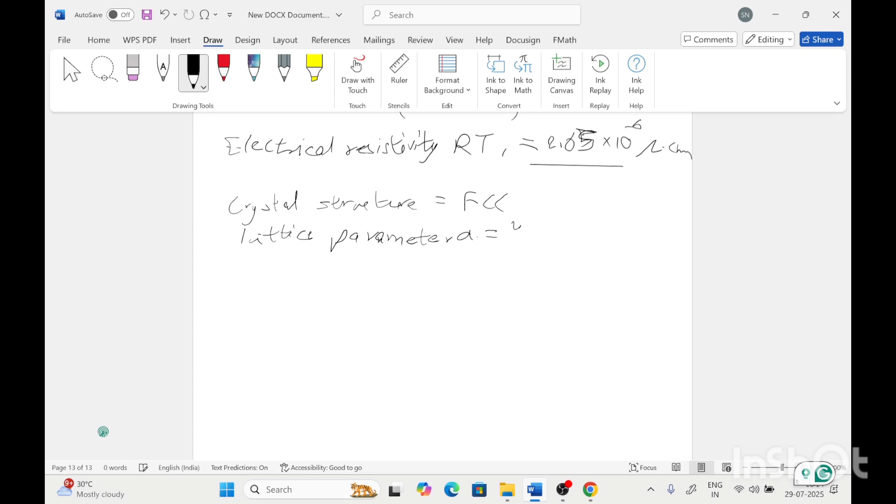Then its crystal structure is FCC. Its lattice parameter a is 4.05 angstrom, and its atomic number is 13, and atomic weight is 26.98, approximately 27, and it is a paramagnetic material.

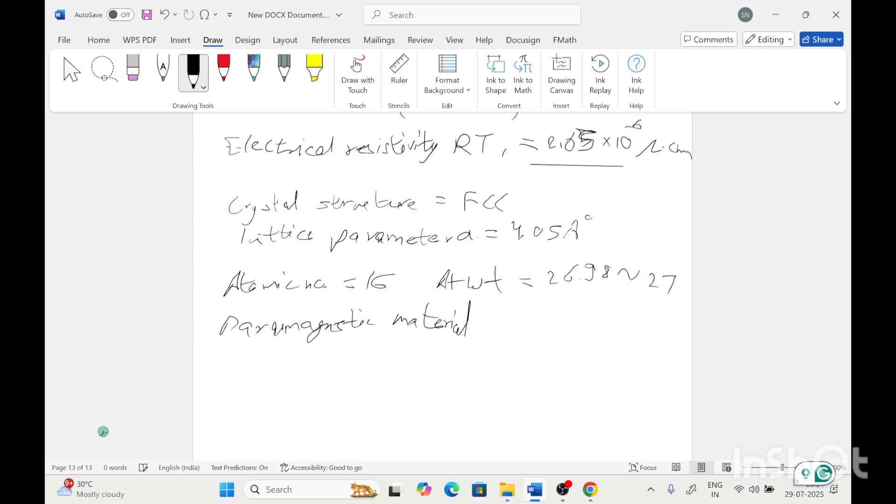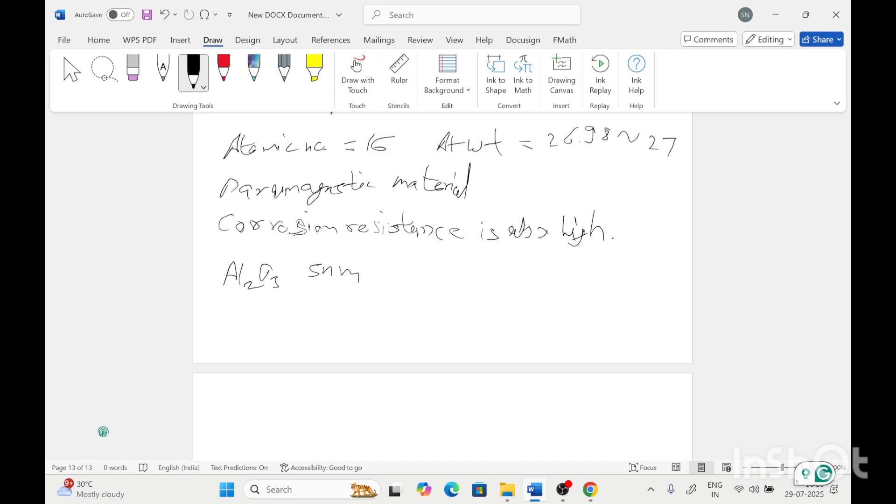So these are the general properties of aluminum. Its corrosion resistance is also high, meaning it does not rust. In iron or steel we can see rust forming, and for copper and silver also we can see some rust form because of oxidation. But aluminum alloy has a very thin layer of aluminum oxide, around 5 nanometers, which is very thin and very adherent to the aluminum surface, and will prevent further corrosion of the aluminum.

And if we talk about its purity and mechanical properties, generally purity is around greater than 99.99%. So if we decrease the purity, its mechanical properties like yield strength, tensile strength, and ductility are affected.

The highly pure aluminum is very ductile. We can form any shape from high purity aluminum. And if we decrease the purity, meaning mix any other alloying element, we increase the strength and decrease the ductility. So with decreasing purity, its strength goes up and ductility goes down.

And its elastic modulus is around 72 GPa, and its shear modulus is around 27 GPa, and its Poisson's ratio is 0.34. So these are the general physical and mechanical properties of the aluminum.

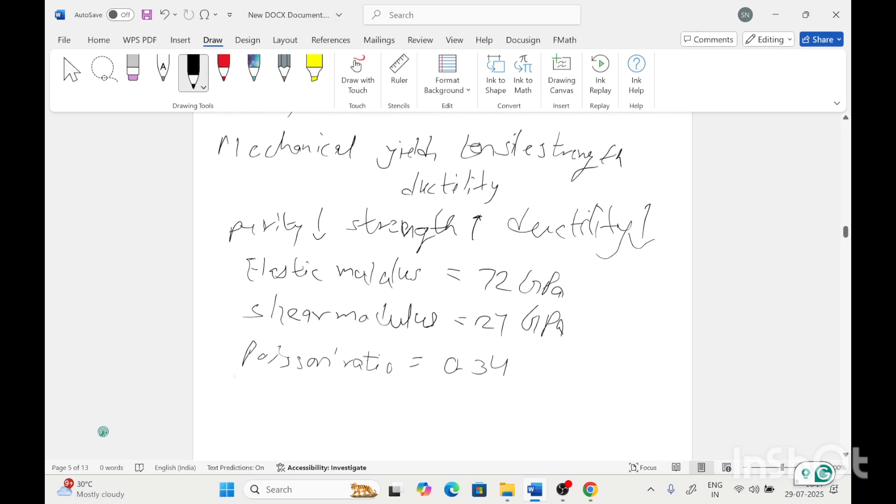Next is what impurities can be in aluminum. First we will talk about the sources, meaning where the impurities come in the aluminum alloy. Impurity sources: the main sources are during the extraction process. Next is the makeup chemicals, meaning in refining we use various types of chemicals, and from these chemicals the impurities can enter the aluminum melt.

Next is the anode carbon, in the refining process. Anode carbon, refractory lining, and fifth is steel tooling. So these are the sources of impurity in aluminum.

And what type of impurities come under these categories? First is elemental impurity, like iron, tin, zinc, copper, magnesium, etc. And also inclusions, meaning compounds. Inclusion forms during the extraction or refining processes like oxides, carbides, nitrides, and borides. So these are the impurities in aluminum.

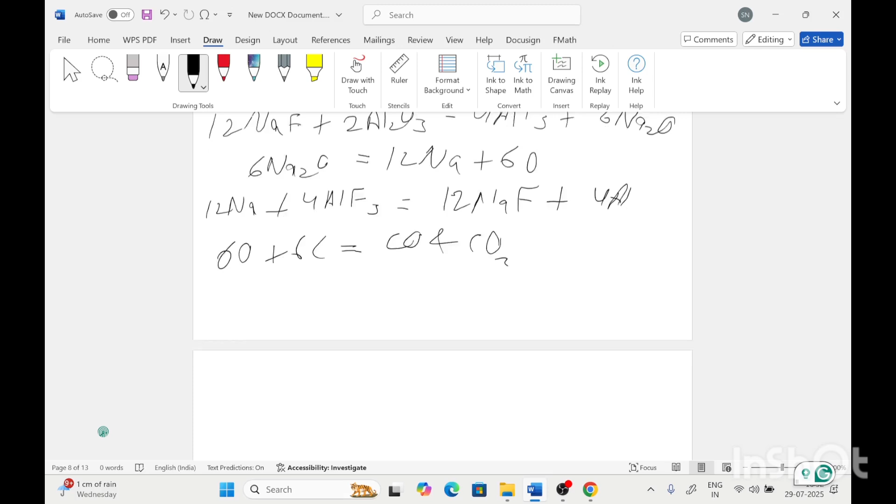The aluminium obtained from this extraction process is refined further to remove other impurities like oxides or elemental impurities. Fluxing is done after the extraction process. The fluxing agents are NaCl or KCl, which remove the oxide inclusions.

After fluxing, once impurities are removed, next degassing is done to remove hydrogen gas, using vacuum.

So this degassing can be generally done by generating vacuum or by gas purging. What we use for gas purging is argon gas. Argon gas is noble and non-reactive, so this argon purging is done.

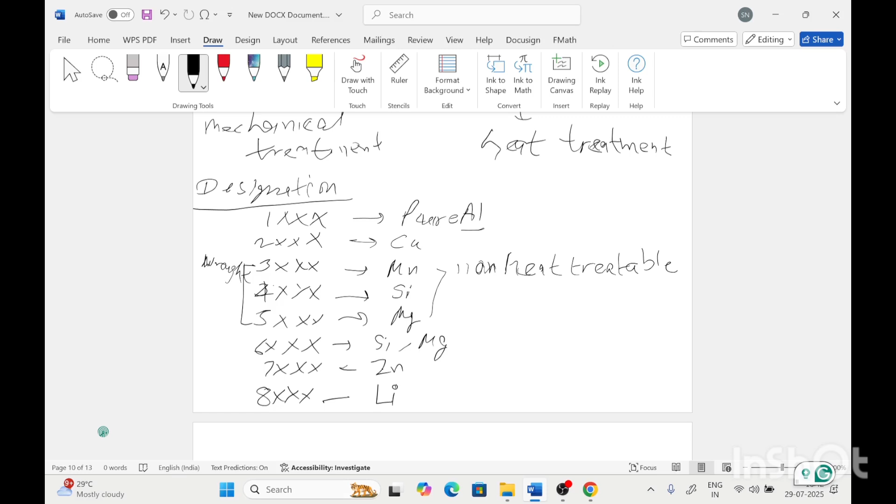And other than this pure aluminum, the 2000 series, 6000, 7000, and 8000 are heat treatable. This aluminum copper is also heat treatable.

So in the casting process, these alloys are further classified into different nomenclature. For casting aluminum alloy, we use other designation.

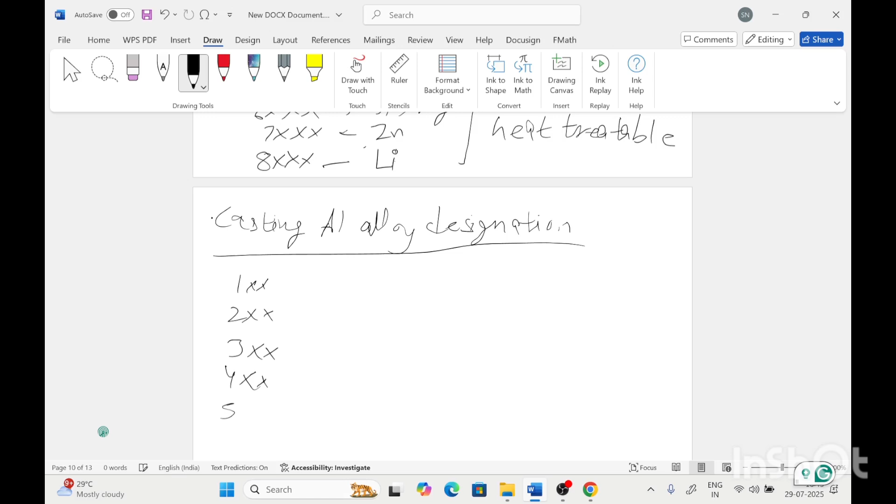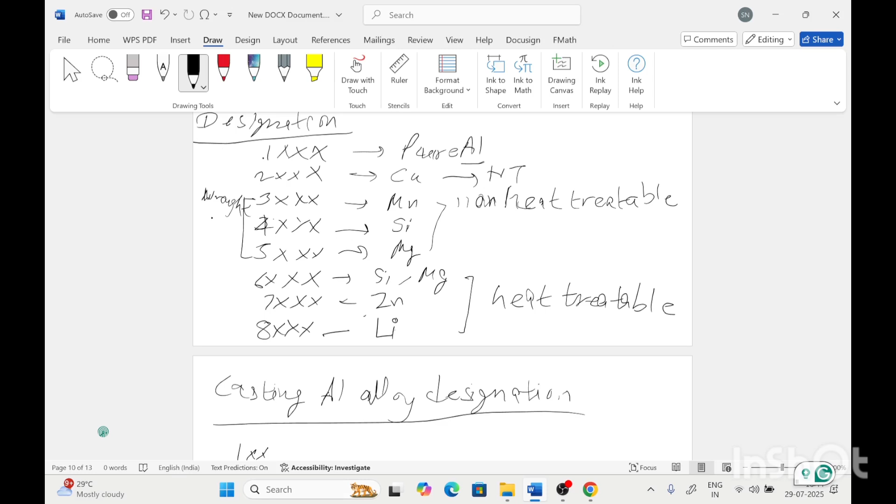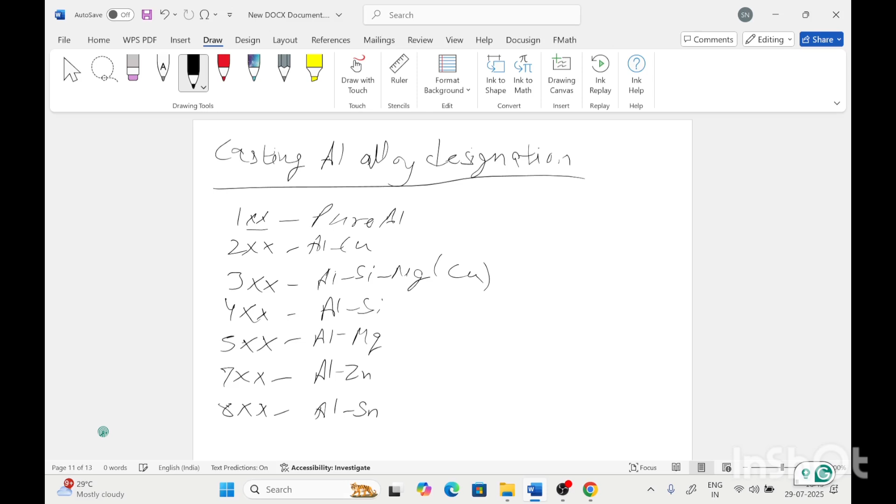For this alloy designation: first is pure aluminum. Second is aluminum copper. Third is aluminum silicon, magnesium, also with some copper. Fourth is aluminum silicon. Fifth is aluminum magnesium. Seventh is aluminum zinc. And eighth is aluminum and tin. So these are the casting alloy designations.

And here another form also comes, meaning 1XX.X or 3XX.X. Here the other digits come, and this X after the decimal point can have two values, 0 or 1. So dot 0 means it is in casting form, and dot 1 means ingot. Both represent the casting alloy.

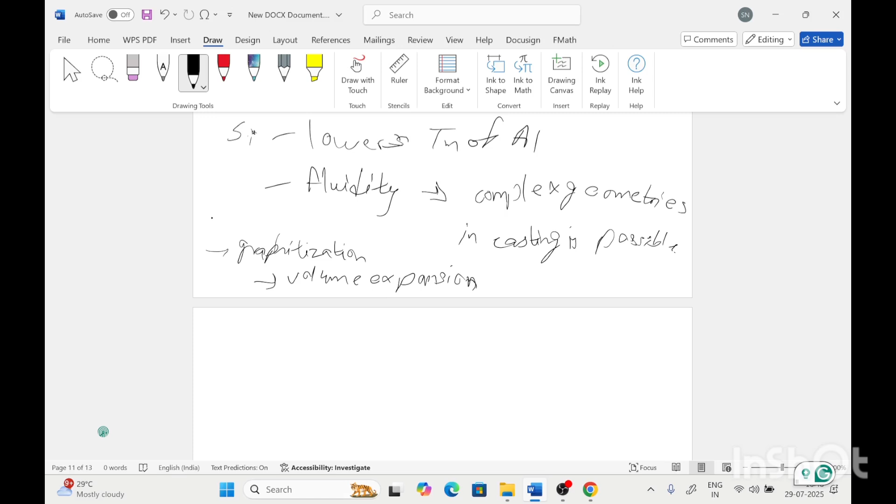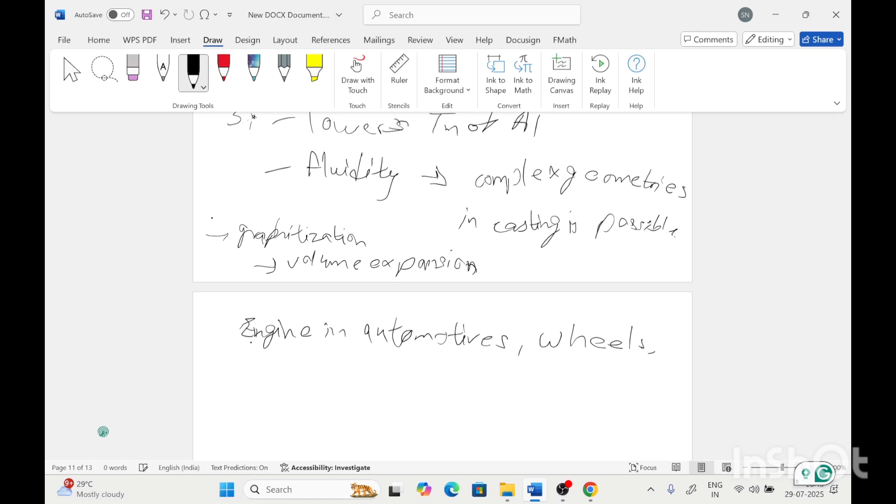This graphitization increases volume, meaning it has volume expansion. So the volume expansion will compensate for the solidification shrinkage during the casting process. So this is also good. It has applications in engines or in automotives, wheels, and so the aluminum alloy in the automotive - the main purpose of the aluminum alloy is weight reduction.

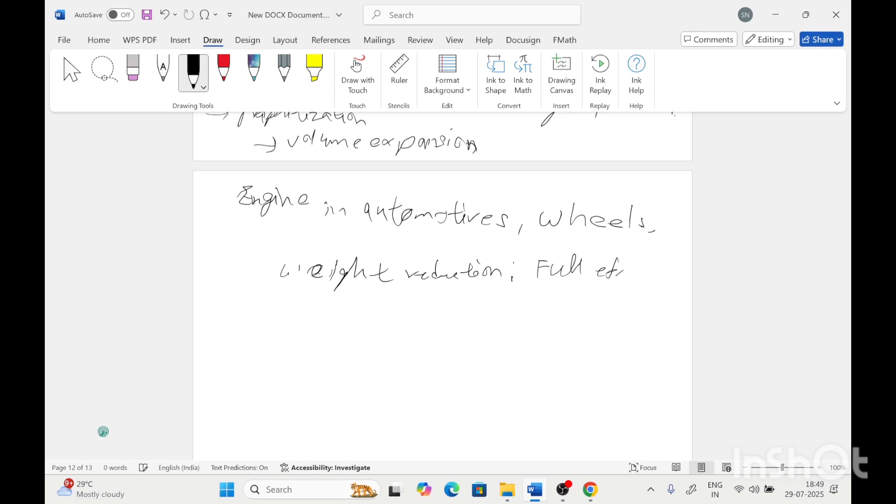Weight reduction will provide the full efficiency of the automotive. So how does silicon modify this aluminum's properties? First we will understand the phase diagram of it.

This is aluminum, temperature in degrees Celsius, and the weight percent of silicon. Aluminum's melting point is 660, and silicon's melting point is around 1400 degrees Celsius. So if we draw a diagram, it has this structure.

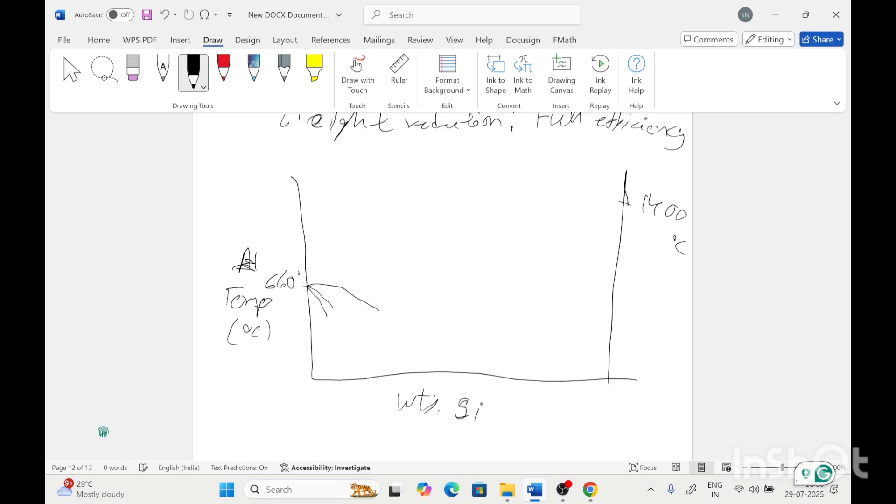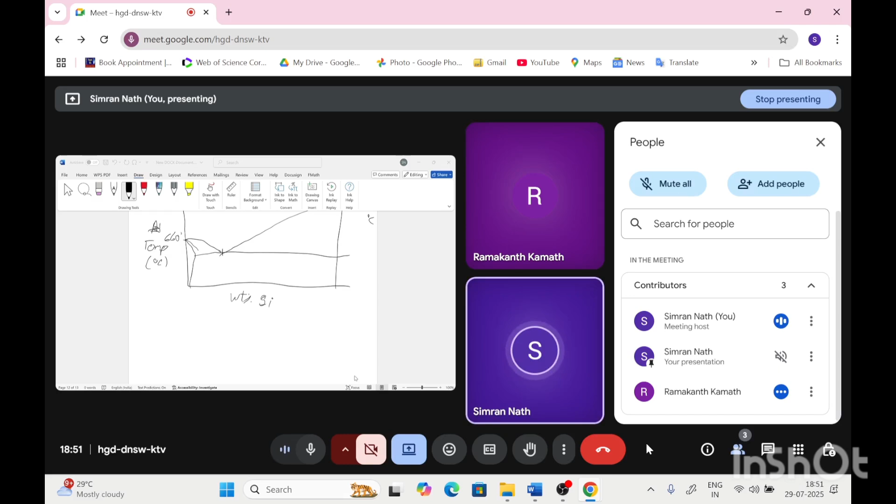This point is called the eutectic. Do you know about the eutectic reaction? What is the eutectic reaction? It means the liquid transforms into two types of solids.

This point is in the eutectic form, so here alpha aluminum plus silicon forms, and the silicon present in the structure of the solidified alloy is in flake form or needle shape. So here is liquid plus silicon, and alpha aluminum plus liquid.

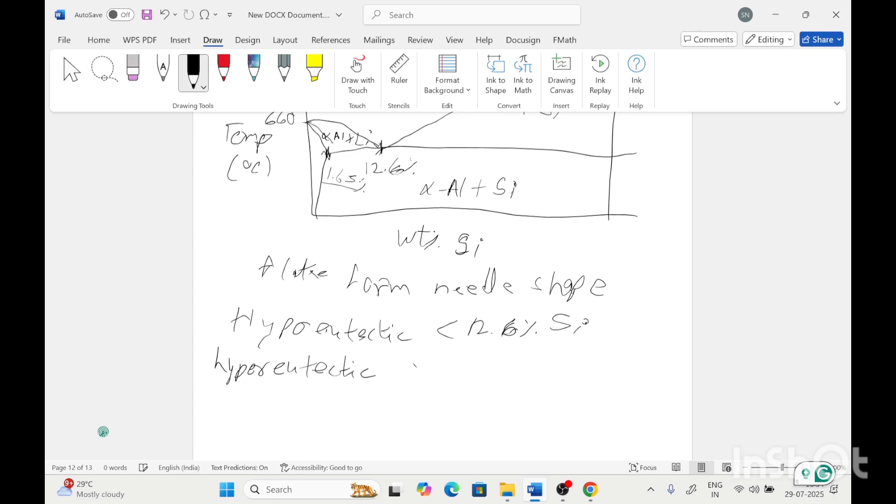Based on the eutectic point, we can divide alloys into two types: hypoeutectic and hypereutectic. Hypoeutectic has silicon percent less than 12.6%, and hypereutectic has silicon greater than 12.6%.

As silicon is present in flake or needle shape, for mechanical performance of the alloy this needle shape is not required because it leads to stress concentration in the component and early failure. So we do not require this needle shape morphology of the silicon.

To modify this morphology, we add a modifier like strontium. The strontium addition is generally 0.02%, very low. This small amount of modifier will change the needle shape into a globular or spherical type. It reduces stress concentration and sharpness of the flakes, leading to a fibrous microstructure.

Other types of modifiers can also be added, like barium and sodium. Only a very small amount of modifier is required to change the shape, the morphology, of the silicon flake.

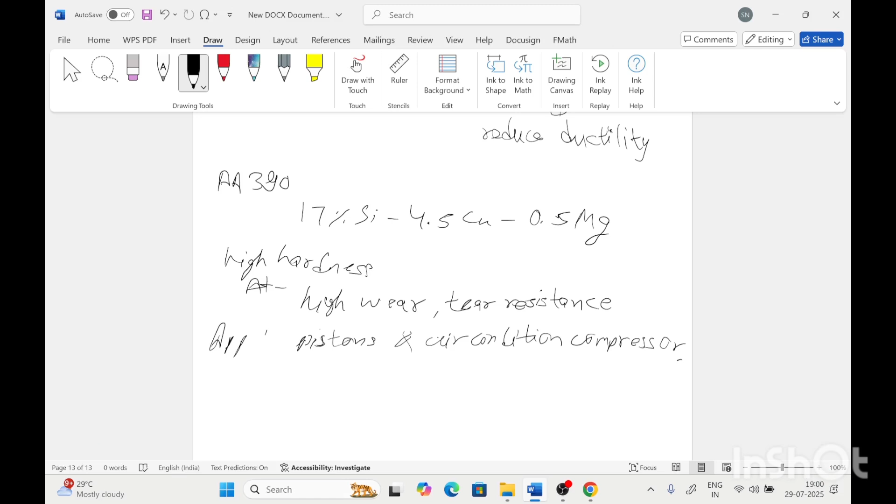The application is in pistons and air conditioning compressors. What compressor, ma'am? Air conditioning compressor - it has that application.

What is the mechanism by which silicon modifies the aluminum properties? If we talk about the growth of silicon particles, how the silicon flakes form - generally silicon has a tetrahedral structure like this type.

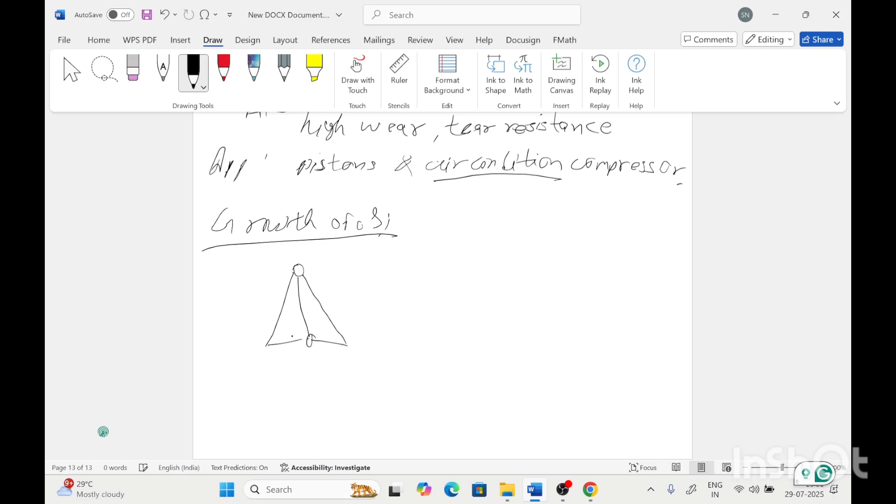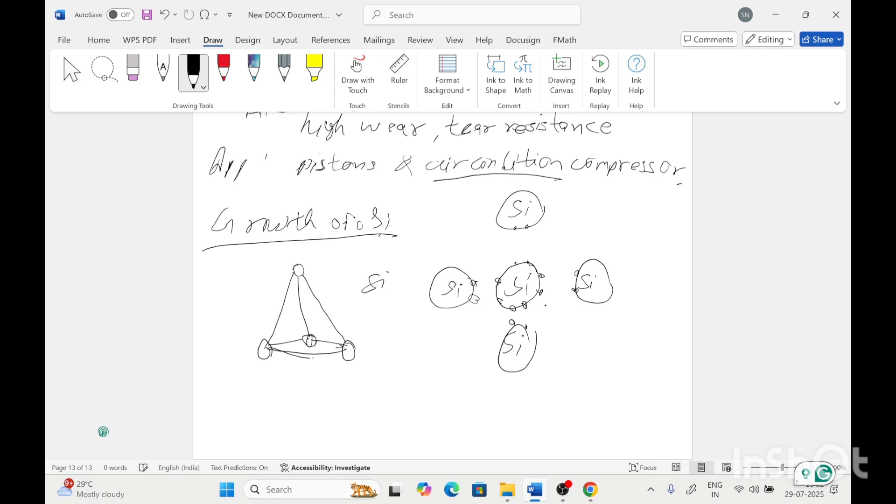This is the silicon tetrahedra, meaning it shares its valency. The silicon completes its structure like this, and for growth of the silicon flake, two tetrahedra are required.

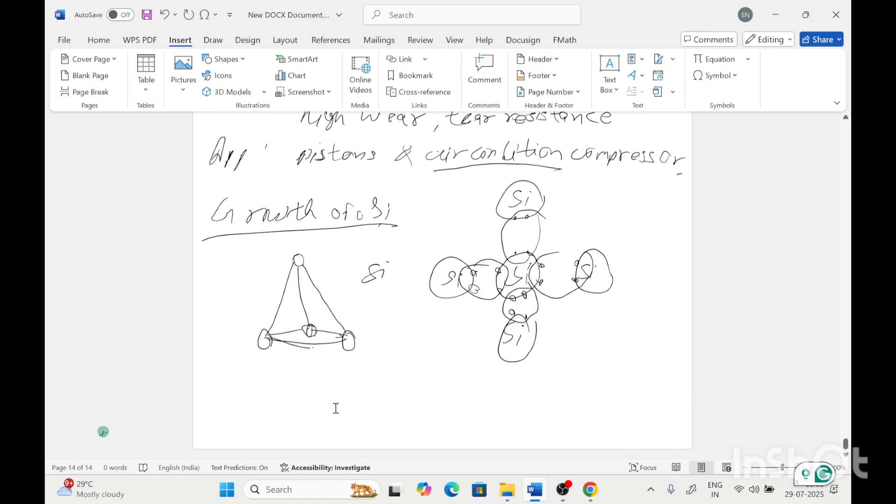So for the growth of silicon flake, two tetrahedra of silicon are required. This forms a structure like this, and the bottom, the second one, like this.

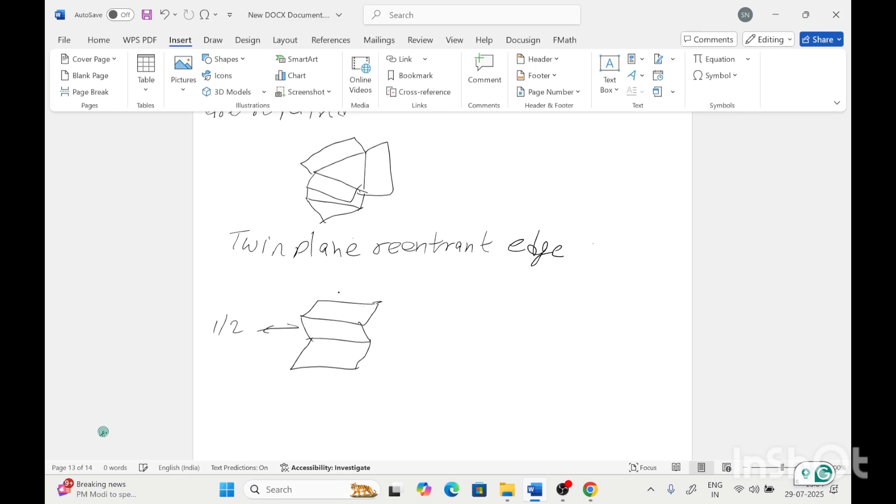This growth generally happens by the twin plane reentrant edge mechanism. Twin plane generally forms like this. This direction is 112 or 11 2 bar, and this plane is 111. So the tetrahedra will arrange in this form, 1, 2, and 3, making the twin plane, and the growth of crystal will go either in this direction or in this direction.

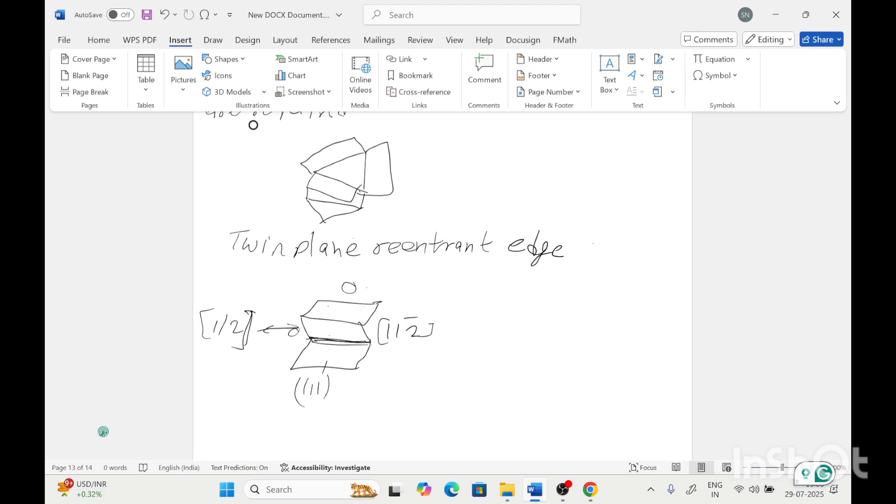Due to this mechanism, the silicon flakes form in needle shape. So to avoid this needle shape formation, modification is done.

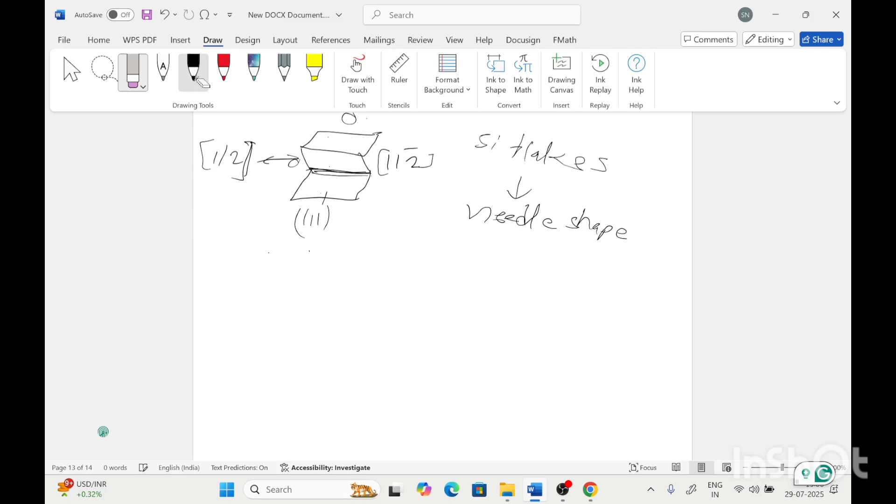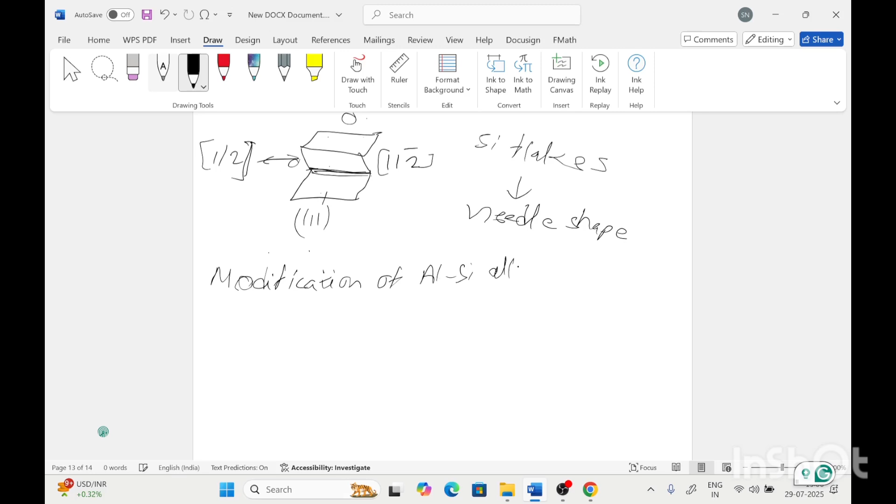Modification of aluminum silicon alloy: one theory is the impurity induced twinning theory. According to this theory, certain elements or modifiers are added, like barium, sodium, or strontium. These modifiers inhibit the growth of the silicon flakes along the 112 direction.

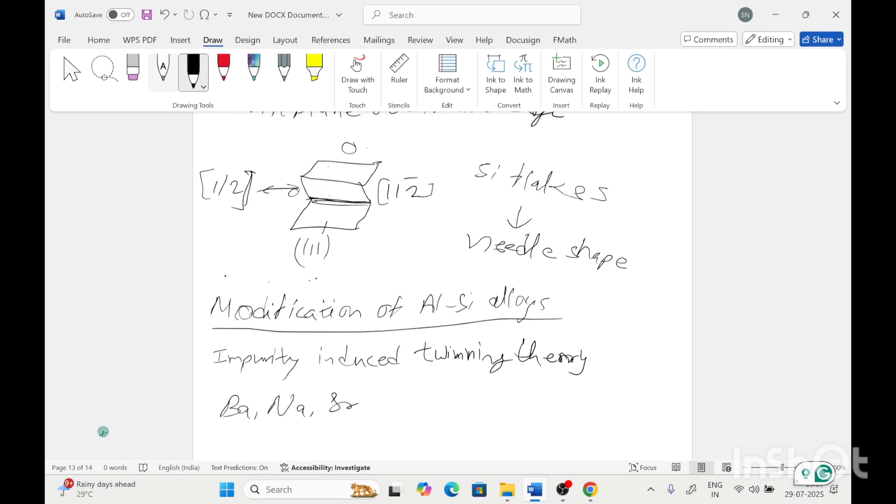By restricting the growth, this restricts the growth of the needle shape, and it also changes the stacking sequence of the tetrahedrons and forms branches during growth.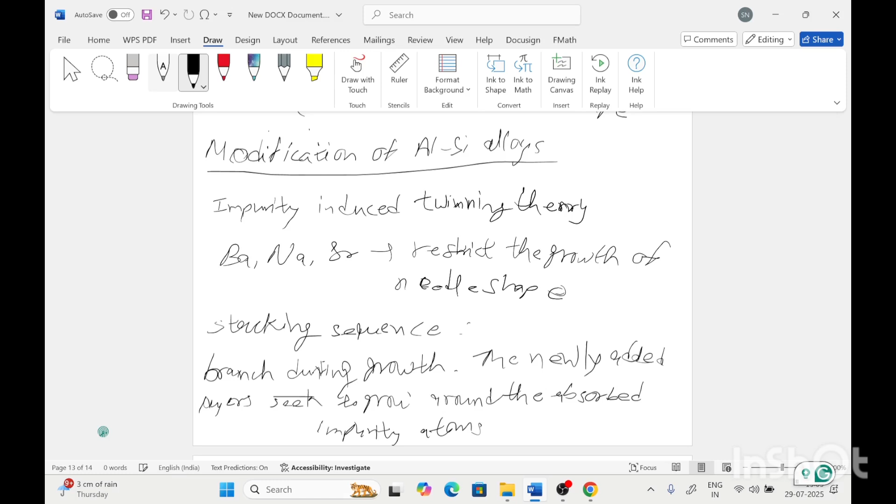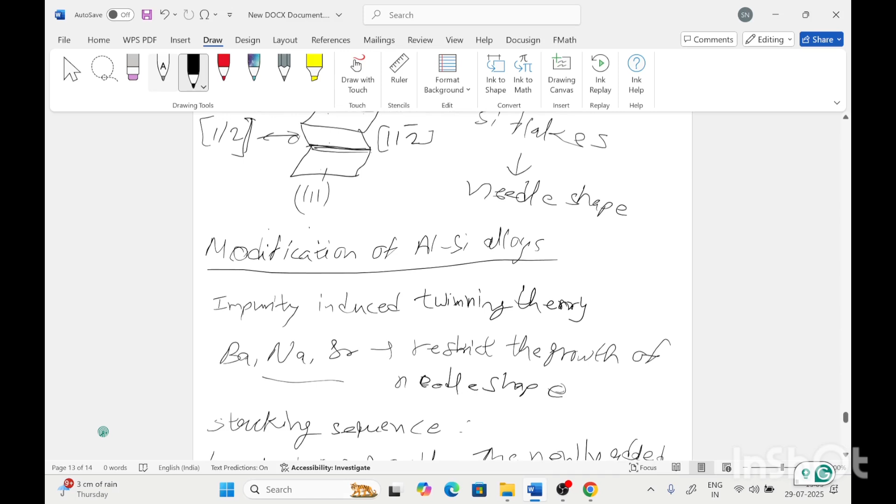The newly added layers seek to grow around the absorbed impurity atoms. These modifier atoms will attach on the silicon tetrahedra during flake formation. Due to that attachment, the stacking sequence changes, and the newly added layer will adsorb on the impurity atoms.

That's why they change the morphology of the silicon flakes. So we will go through this one.

Now we'll study about some manufacturing processes, meaning the primary manufacturing processes of the aluminum alloys. Do you have any doubt up to this point, or can we proceed further? Proceed, ma'am. Okay.

Primary fabrication. Okay, maybe one question, ma'am.

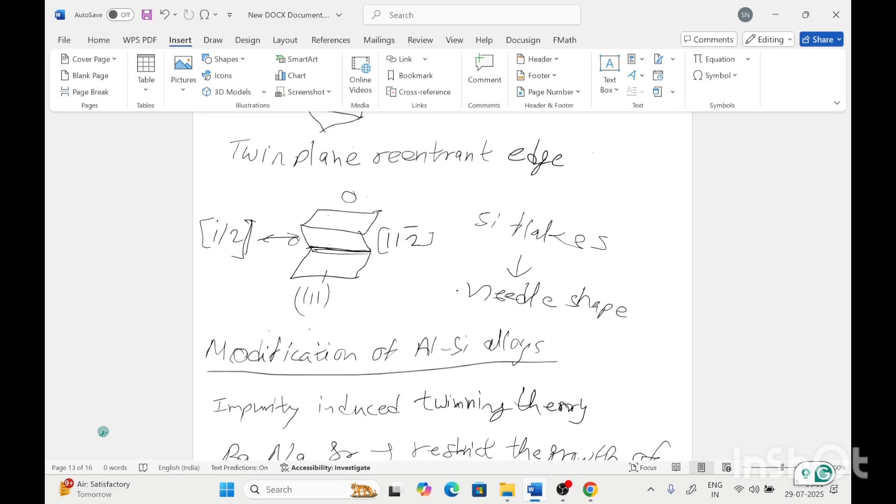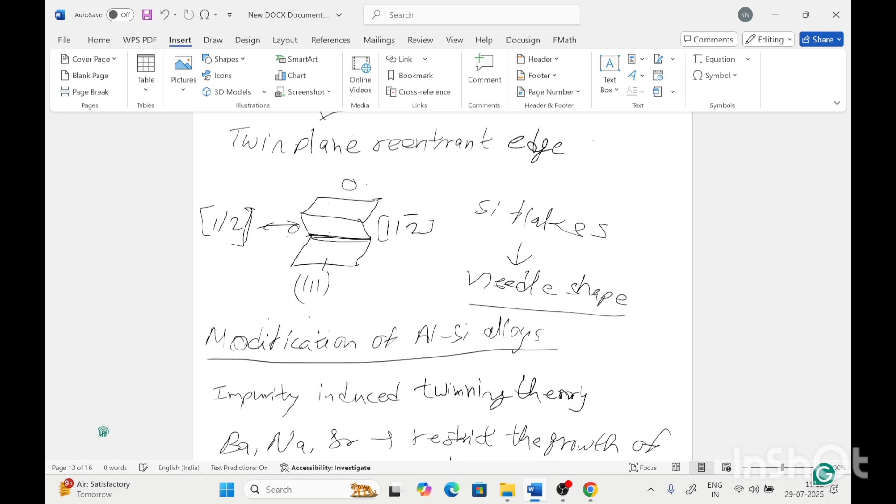What is actually the impurity induced twinning theory? Yes, the growth is around this twinning plane. So twinning plane is 111 and direction is 1 1 2 bar. The modifier atoms will attach here or in this direction, and as the silicon atoms come, they will have to adsorb on these modifier atoms, so the flake formation sequence will break, and that's why the needle shape will not form. Okay, okay, ma'am.

The primary fabrication process: first comes the casting process, after the liquid melt formation the liquid aluminum or aluminum alloys are cast. The most widely used casting process is the direct chill process. In direct chill process, the aluminum liquid is directly fed into a water cooled mold.

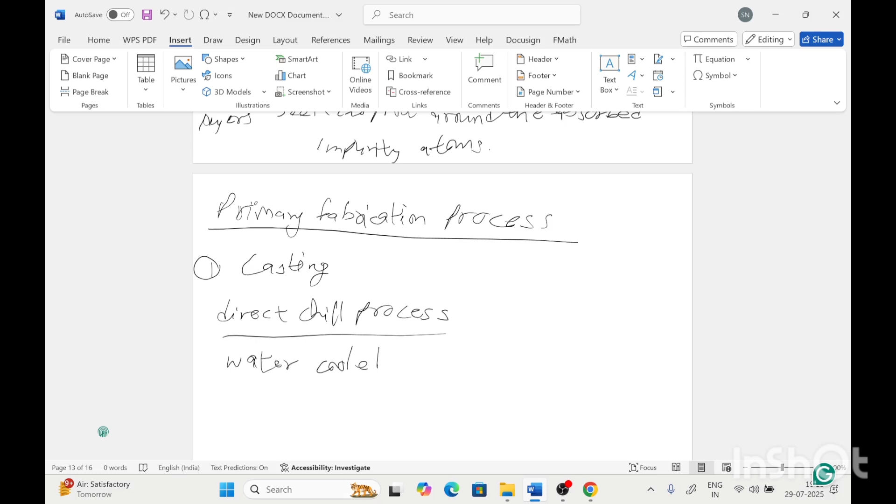The use of this water cooled mold is to avoid segregation of the alloying element. Segregation causes the microstructure to be non-uniform, degrading mechanical properties. By providing this water cooled mold, segregation will not happen and solidification will be uniform. The water cooled mold can be of any required shape.

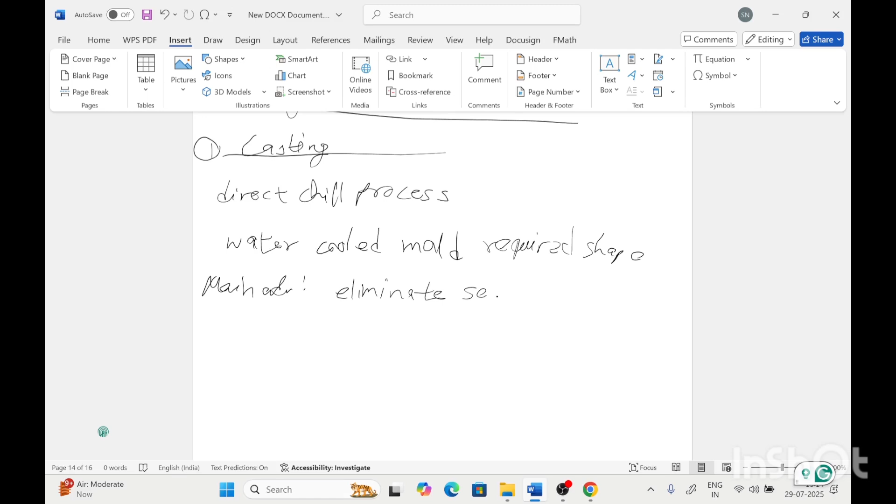The main advantage is it eliminates segregation, which otherwise occurs in high strength alloys.

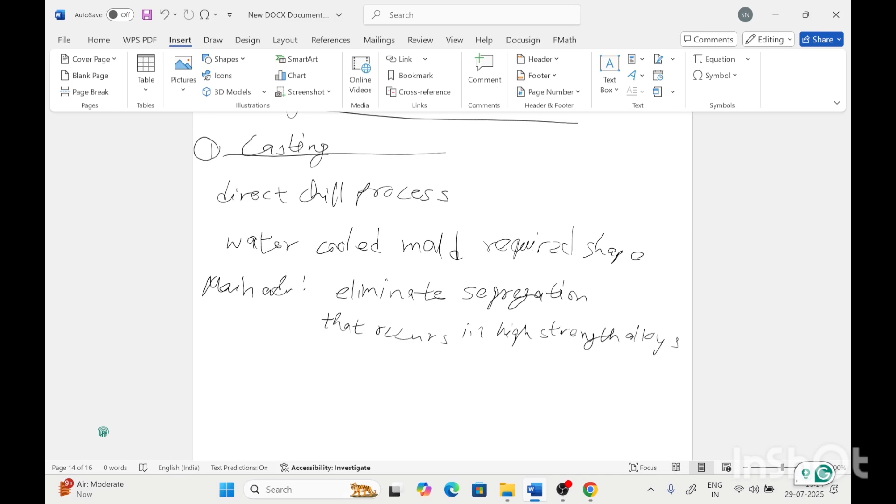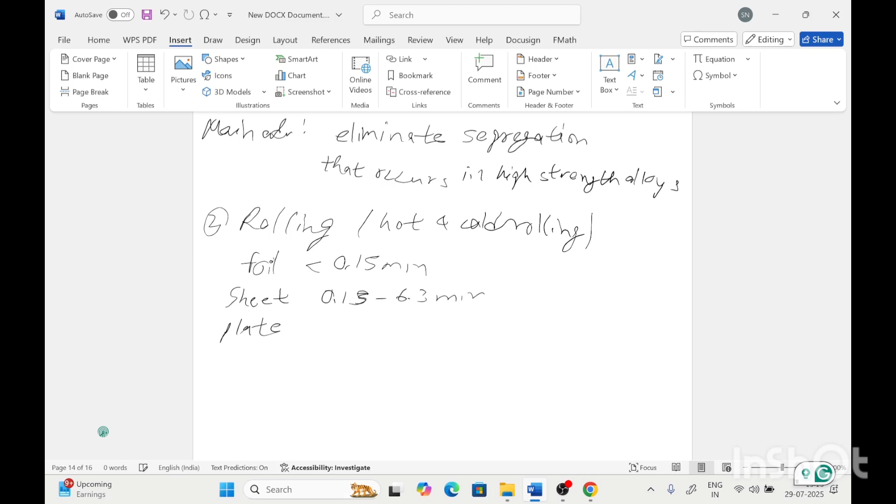Next is the rolling process. In rolling, hot or cold rolling can be done, producing aluminum foil, sheet, or plate form. The thickness of foil is less than 0.15 mm. Sheet has a thickness around 0.15 to 6.3 mm, and plate thickness is greater than 6.3 mm.

Next process is extrusion. In extrusion also, hot and cold extrusion can be done. In rolling we form flat sheets or foil, and in extrusion we reduce the cross section of any ingot or billet, in cylindrical or rectangular type. So the cross section is reduced in extrusion, or other shapes can be given.

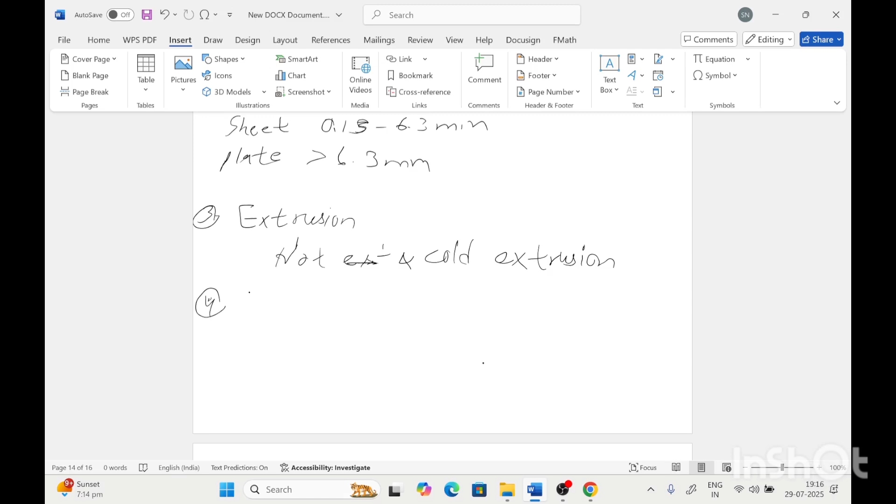Next is forging. In forging, we use a die to form different shapes according to the application.

Then other processes come like deep drawing, used to form wires or tubes of the aluminum alloy. Deep drawing, stamping, punching, drilling, or tapping - these are the primary fabrication processes.

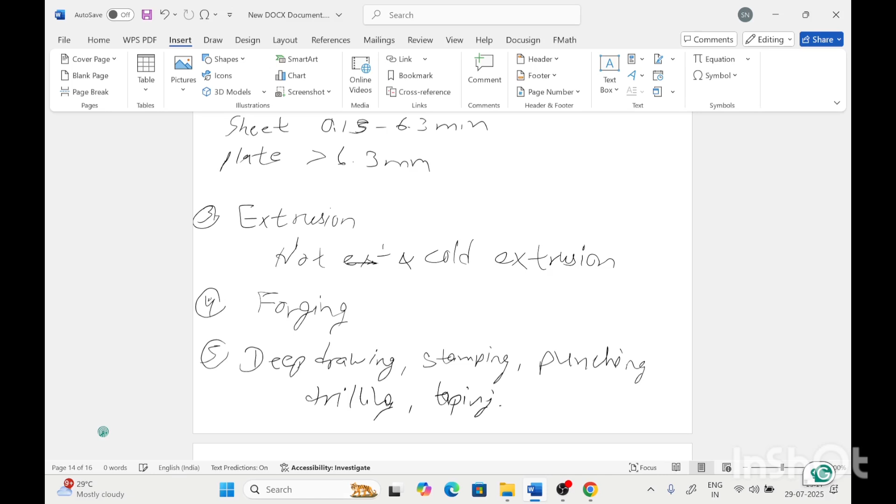Aluminum alloys are also used in welding, or joining processes, meaning joining and fastening.

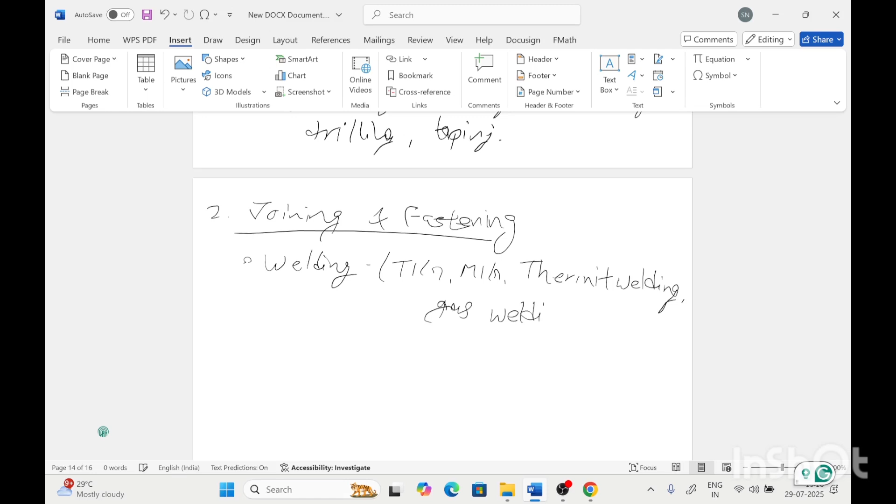In joining process, welding comes. There are types like tungsten inert gas welding, metal inert gas welding, thermite welding, and gas welding, which are generally used for aluminum alloys.

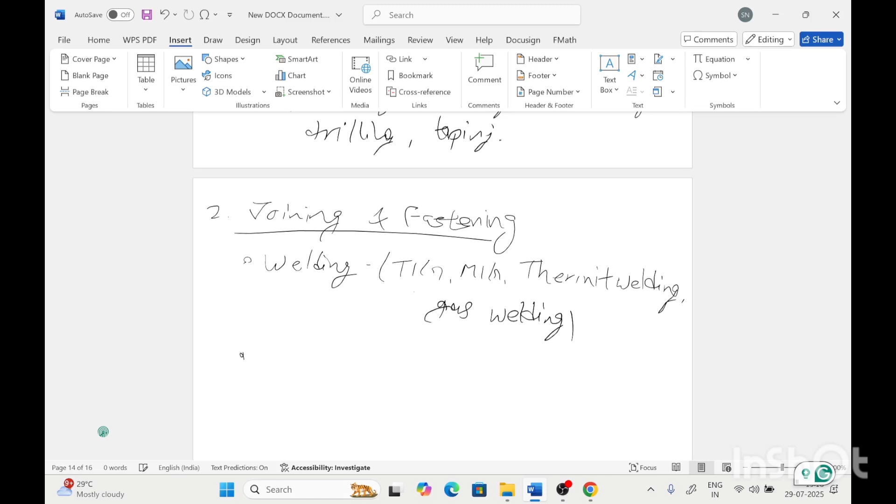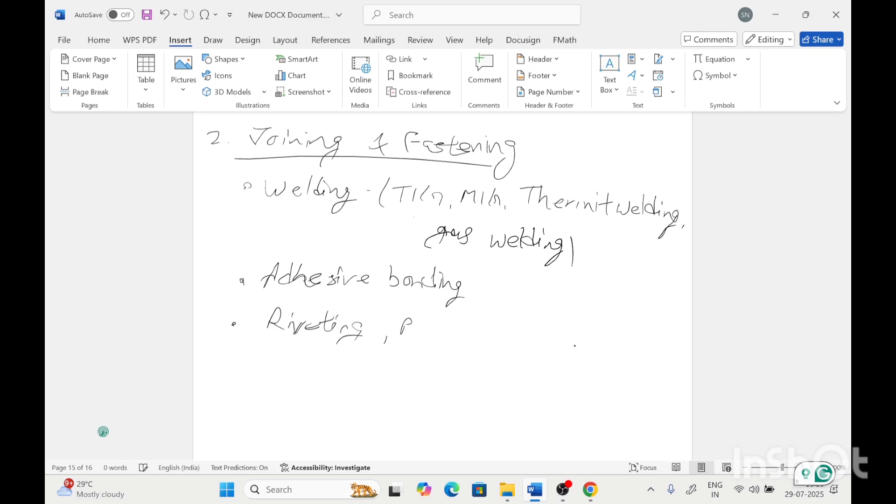Next, adhesive bonding can be done, and riveting or bolting. These are the joining processes. Next, surface treatment of aluminum alloy can be of two types.

One is anodizing, where another metal is coated on the aluminum alloy to increase its hardness, wear resistance, tear resistance, or corrosion resistance.

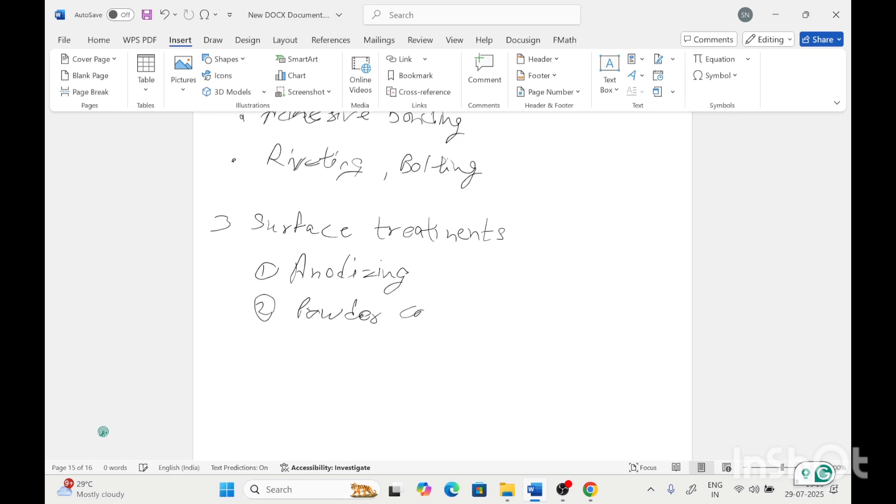Next is powder coating, and fourth, the powder metallurgy process is used to form components, meaning near net shape or complex components can be made using the powder form.

Next is additive manufacturing, which is generally used in recent days. Aluminum alloys can be formed by additive manufacturing in two types: wire arc additive manufacturing, known as WAAM, or laser directed energy deposition. There is one more additive manufacturing process, LPBF, meaning laser powder bed fusion.

But aluminum alloys have very high reflectivity to laser, so the process efficiency will not be good, and the efficiency will be low for laser manufacturing. So wire arc additive manufacturing, which is a modification or commercialization of the welding process, is very useful for additive manufacturing of aluminum alloys.

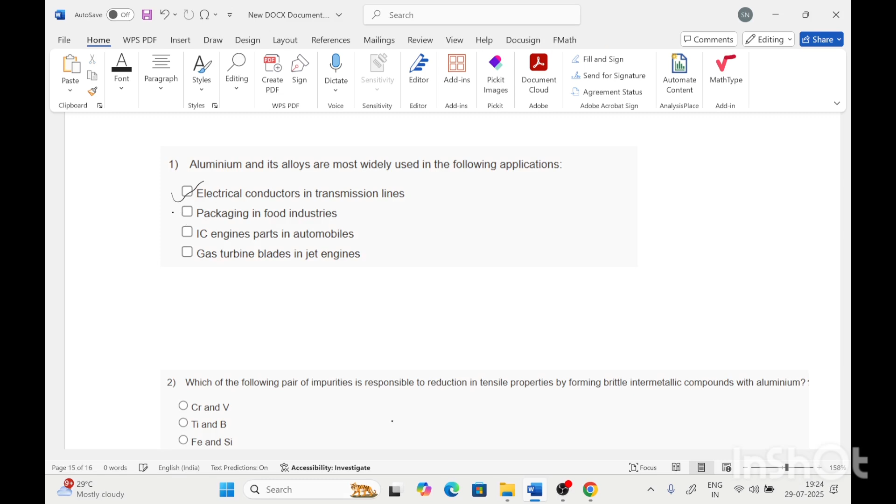Next question: which pair of impurities is responsible for reduction in tensile properties by forming brittle intermetallic compounds with aluminium? Iron and silicon, yes.

Next question, purity level of commercially pure aluminum is - fourth option, 99.5 to 99.79. Yeah.

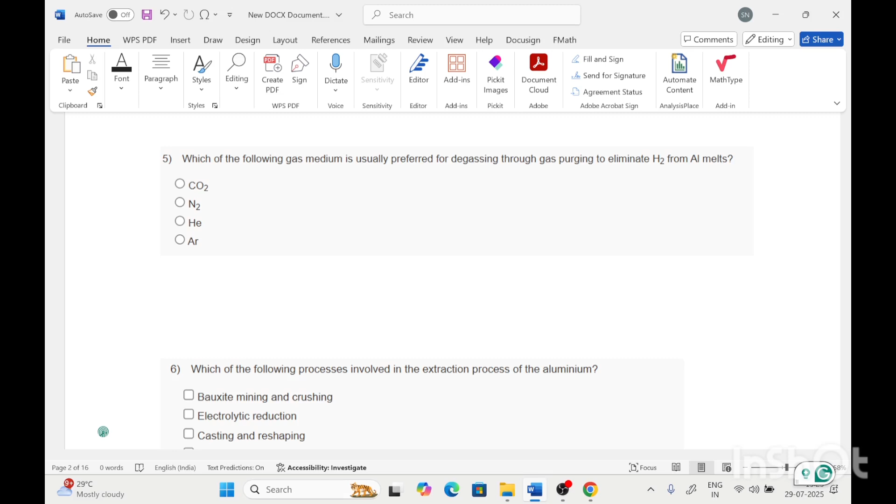Next question: which gas medium is usually preferred for degassing through gas purging to eliminate hydrogen from aluminum melts? Argon, yes.

Next question: which processes are involved in the extraction process of aluminum? Electrolytic reduction, yes. And bauxite testing also? No. The process is bauxite mining, crushing, then electrolytic reduction.

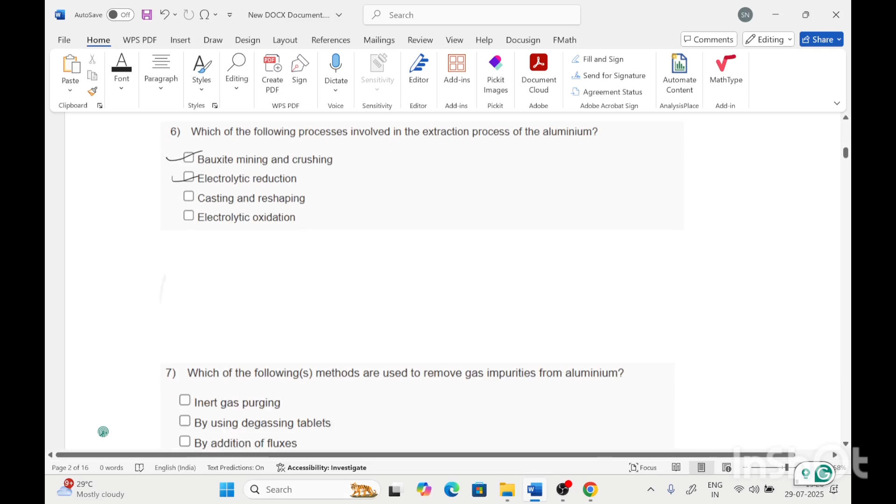Next question: which methods are used to remove gas impurities from aluminum? Inert gas purging is correct, degassing tablets also is correct. Yes, inert gas purging and degassing tablets.

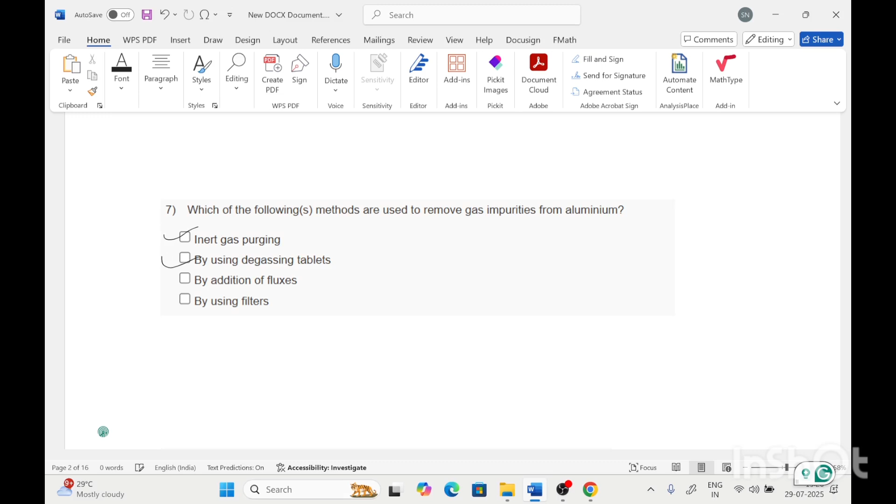Next question: what is the main ingredient present in tablets used for degassing? C2Cl6.

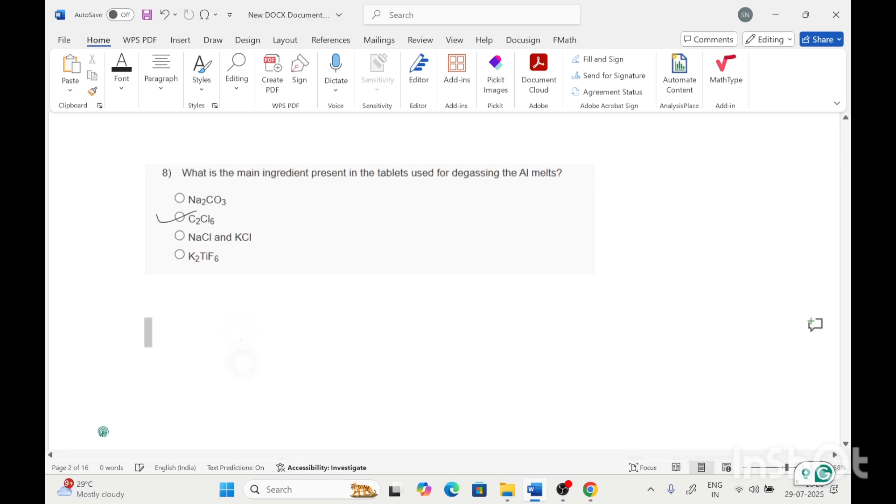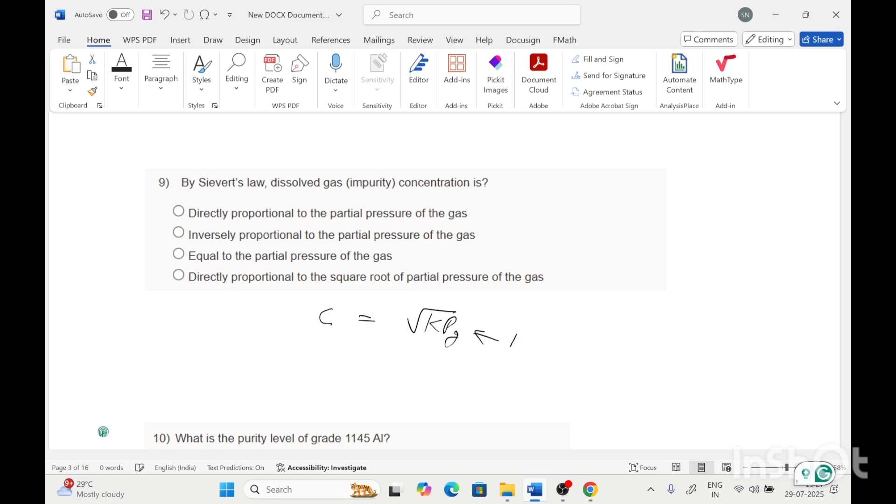Next question: by Sievert's law, dissolved gas impurity concentration is - but we have not learned this today, I skipped that point. Sievert's law says how much concentration of gas is dissolved in the metal. This is given as concentration of the gas equals square root of K times Pg, where Pg is the pressure of the gas, or the square root of partial pressure of gas. So the fourth option is correct.

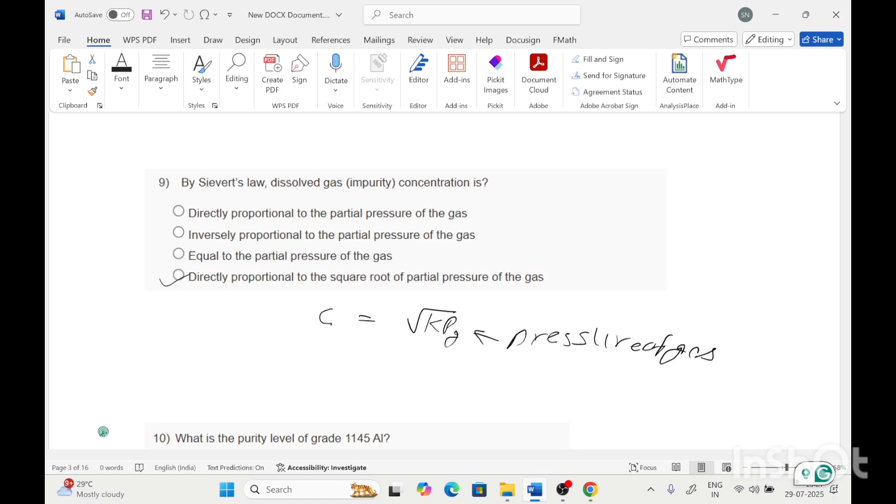Next question: what is the purity level of grade 1145 aluminum? 99.45, yes - the last two digits define the purity level of this aluminum after 99. So this is all.